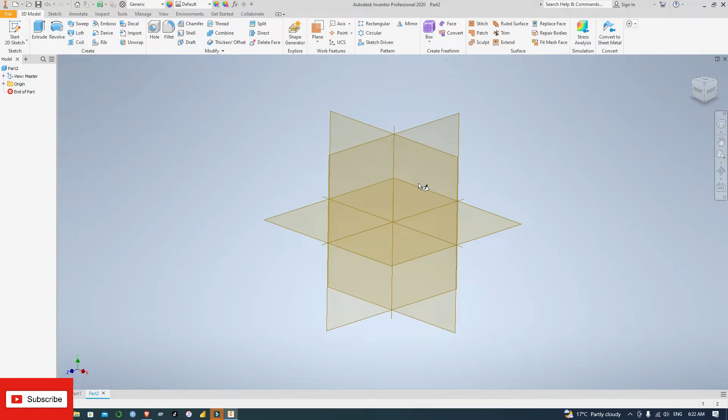Hi, let us sketch simple parts today. When you're doing your sketches, remember that speed is key. You may be given a task and the person wants quick delivery, so always know the easiest methods possible to conduct a task, and assess the easiest approach for you to make the drawing.

We are going to start with drawing the center lines, then offset to the right and to the left, then make the fillets. I'll begin with a center line, and move to the right by 125.3.

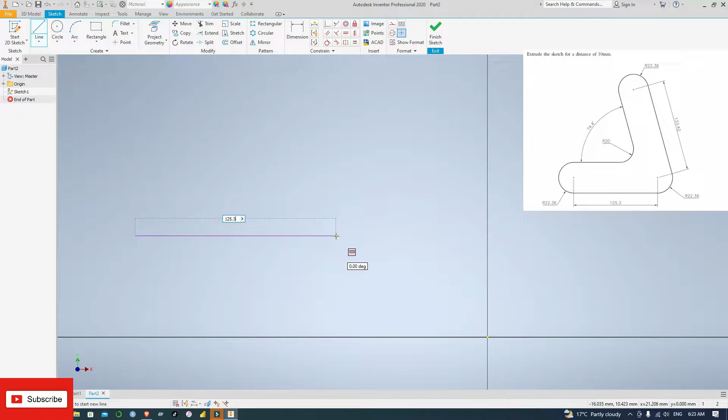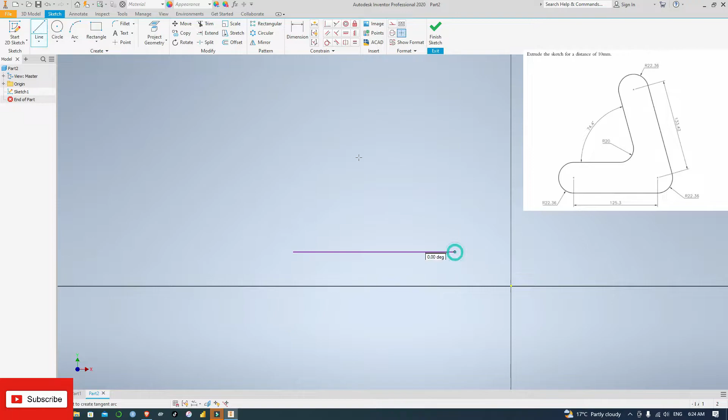Let's move it to this other quadrant. Let me delete the dimension. Then another line from this point going to this other side with a dimension of 133.42. Let me delete this for now, and the angle between these two lines is 74.4 degrees. Enter and click escape.

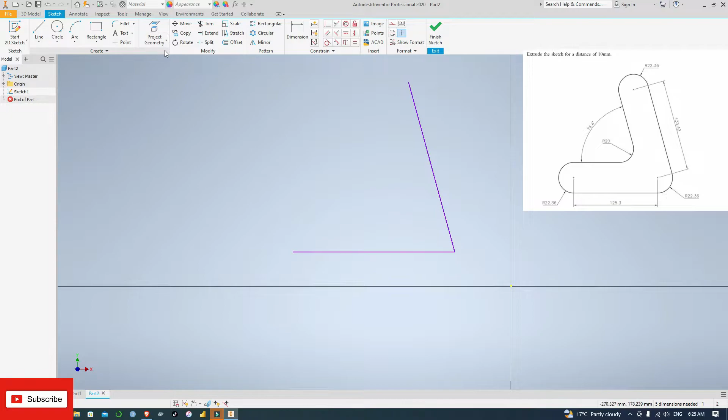I'll delete this dimension, then offset to the right by a radius of 22.36, offset 22.36, offset to the left by 22.36.

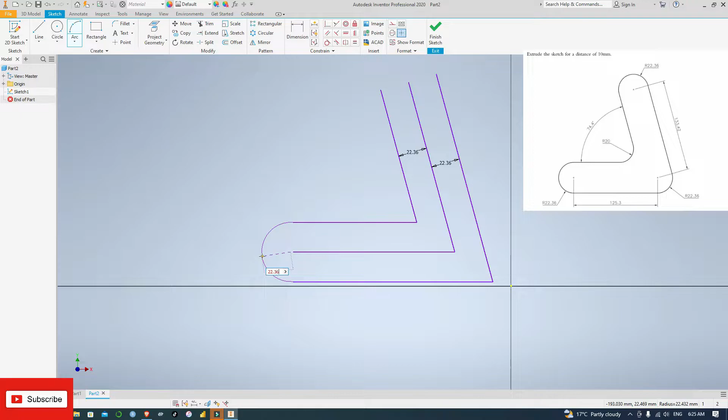Then create an arc, a 3-point arc, by 22.36. Then create another arc, by 22.36.

Next is to fillet. The fillet radius, I'll use 20. Escape, delete this. Then again fillet this point with a fillet radius of 22.36. Click escape so that I can fillet 22.36.

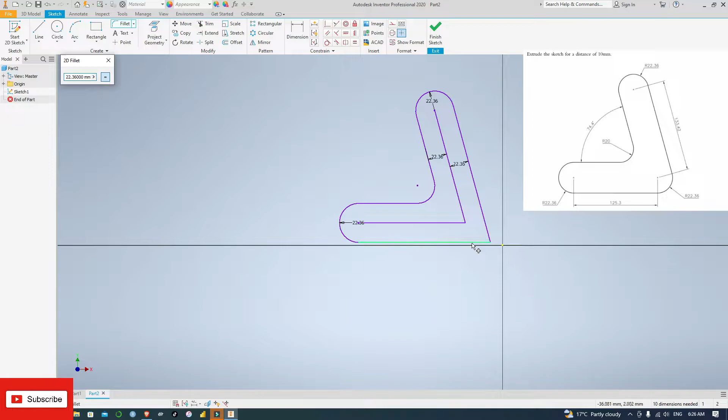Delete the center lines. Delete this so that you can create the right dimensioning.

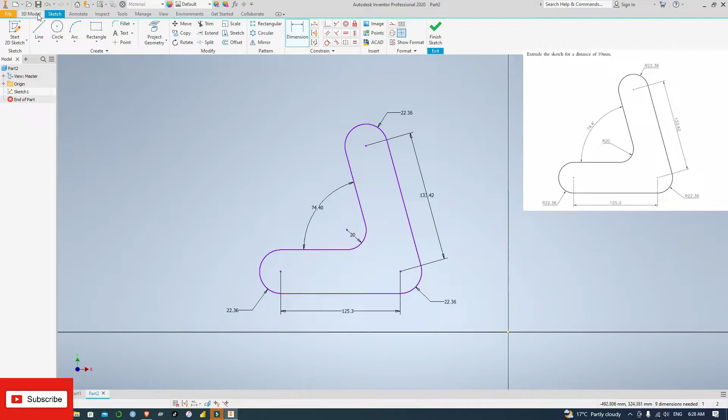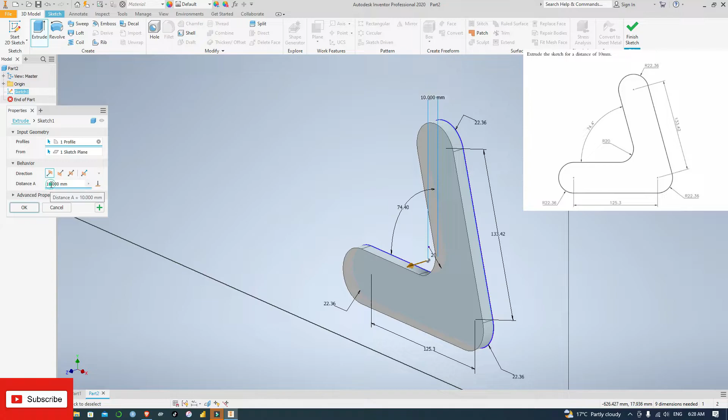One of the instructions is to extrude this by 10 millimeters. So I'll extrude this by 10 millimeters. I'll come to the 3D model, extrude. Let me move this first to this. Yeah, extrude by 10 millimeters. That is okay, then I'll click OK.

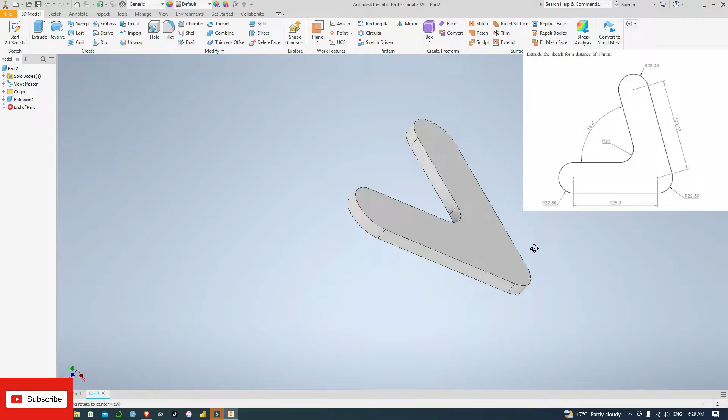So this is how it looks like. I press Shift so that I can check it from all angles. Hold Shift and scroll, and hold the Shift and scroll button so that you can move it and check it through any angle that you wish. Okay, there you have it.

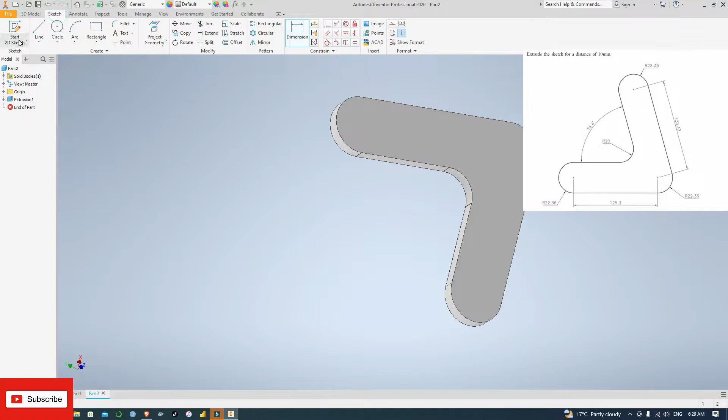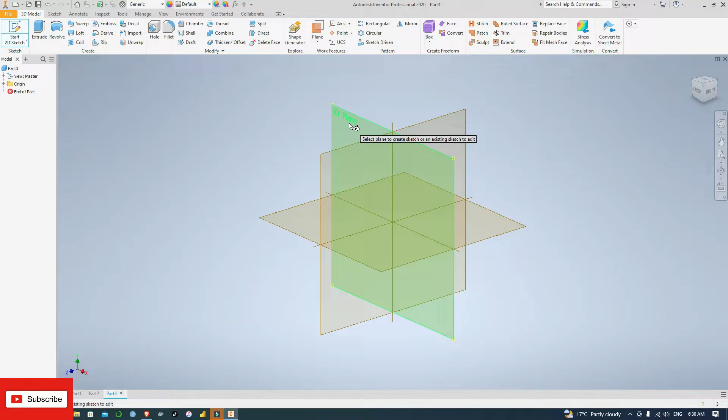Next, you go to the next sketch. Start a 2D sketch. New part, create. After creating, you start a 2D sketch, choose the front plane. Yes, let's move to the next diagram.

In this diagram, when you assess it, we're going to mirror. So I'm going to start from the midpoint, 40 to the left, to the right, 60 upwards. Then I'm going to offset these and take 160 upwards, then move, and then draw a point from here to here. Then I'm going to offset this by 20, then move this by 130 downwards, then I'll mirror it, then use this arc and create this arc, then complete the diagram. So let me begin.

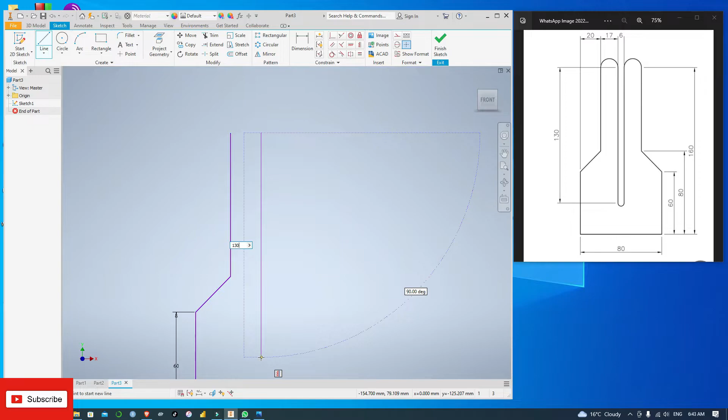Then I'll draw a line from here, goes down by 130, at an angle of 130. An angle of 90 degrees. Then I'll make sure that between here and here the distance is 20.

No, the distance is 17. Then I'll remove the dimensions, then draw a 3-point arc between here and here. Let me draw a 3-point arc. The radius will be 8.5.

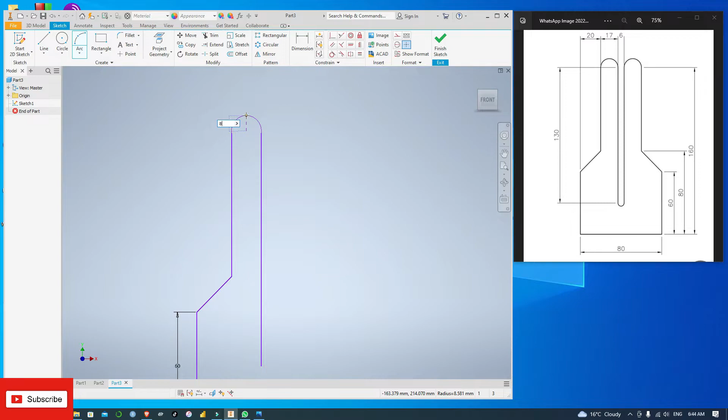So right, we've completed the first.

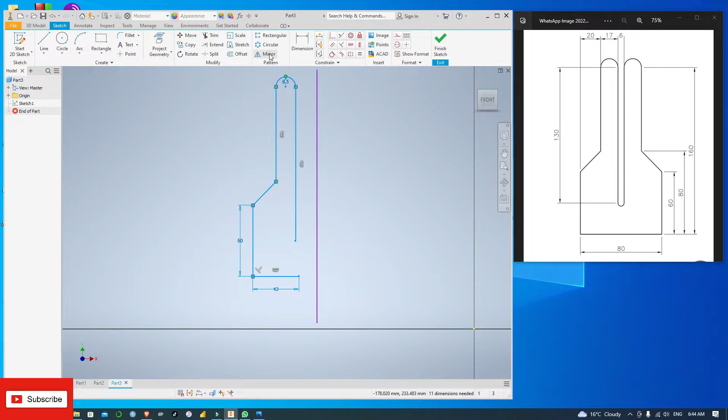So I'll draw this and use the mirroring function. This is the mirror line. Then I'll mirror this. Highlight, mirror. I've selected the mirror. Let me select the mirror line and click apply. Okay, let me remove the mirror line.

Then the distance between these and this is 6. Then I'll draw a 3-point arc between these and this. The radius will be 3.

Let's try to make this coincident. Then delete this such that you start dimensioning the figure.

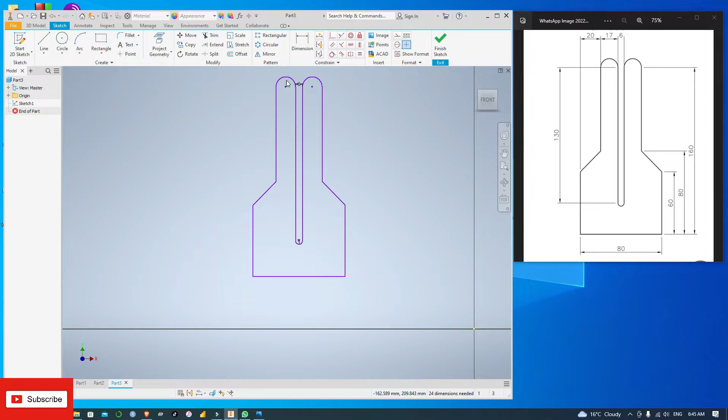And all the dimensions have to be similar to this other side. So let's move this. Let me remove this and move this down. Remove this.

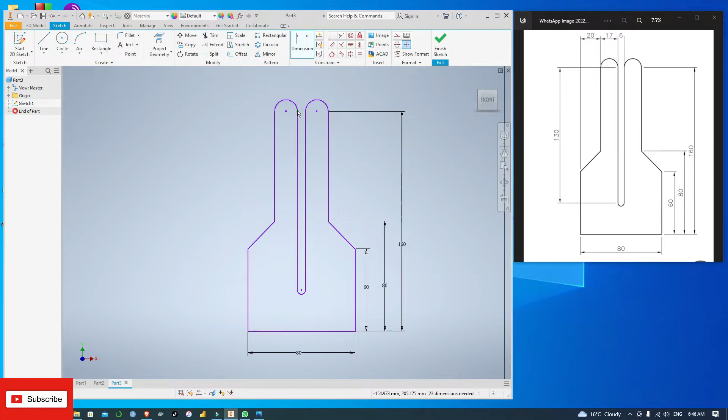So the dimension from here to here is 80. Then from here to here, the dimension is 60. Then from this point to this point, the dimension is 80. Then from this point to this point, the dimension is 160. Then from this point to this point, the dimension is 130.

Click OK. Then from this point to this point, the dimension is 20. From this point to this point, the dimension is 17. Then from this point to this point, the dimension is 6. So we've completed the diagram, and that's it.

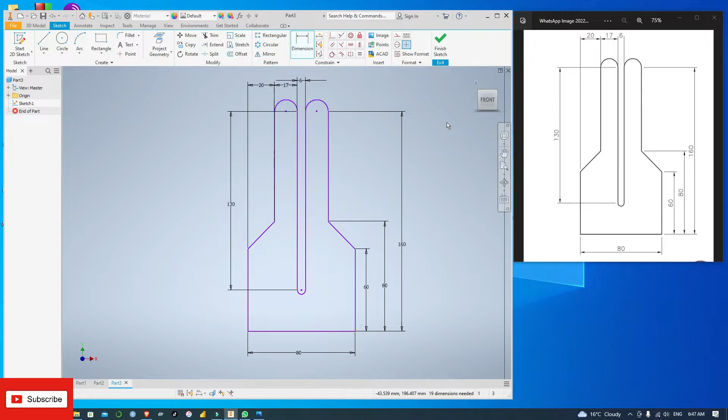Hello and welcome. Let us look at the next simple but complicated design. Let's give it a try.

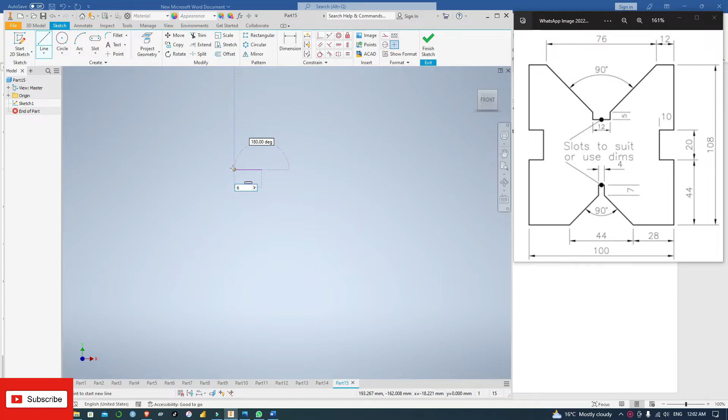From the midpoint to the right, let's use 6. Going upward, let's go 5. Then from one edge to this point, let's select 12. Then from this point to this point, let's select 38. Let's put it here. This has to be 38.

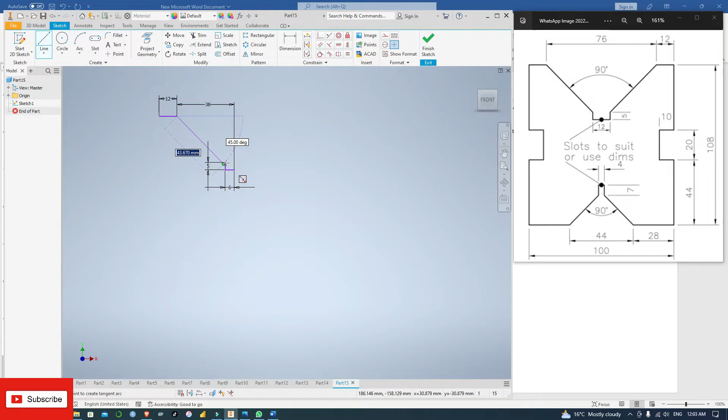Enter. Then let's use this line from here to here, and this angle between this line and this line has to be 45.

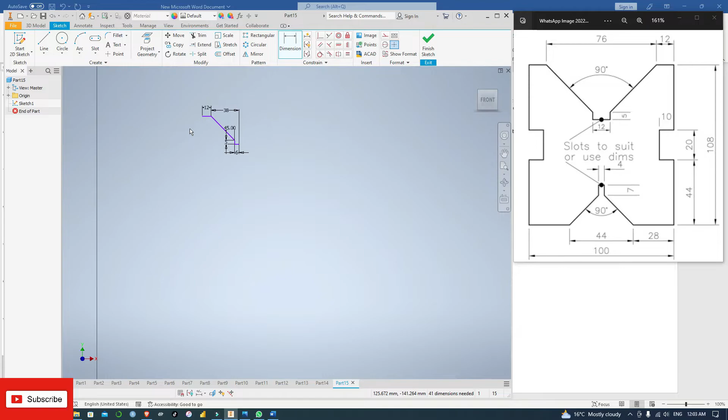Okay, you're good. Let's move to the next drawing from this section, bottom to the bottom section, moving to the right, moving until this point. And let's draw the sketch.

From this point to here, from here to here is 44, meaning the whole of it is 108, so from this point to this point is 44, meaning this one is 20. So I'm going to move down by 44, then I'll move to the right by 10.

Then I'll move down by 20. Then I'll move to the left by 10. Then I'll move downward by 44. Then I'll move to the right by 28.

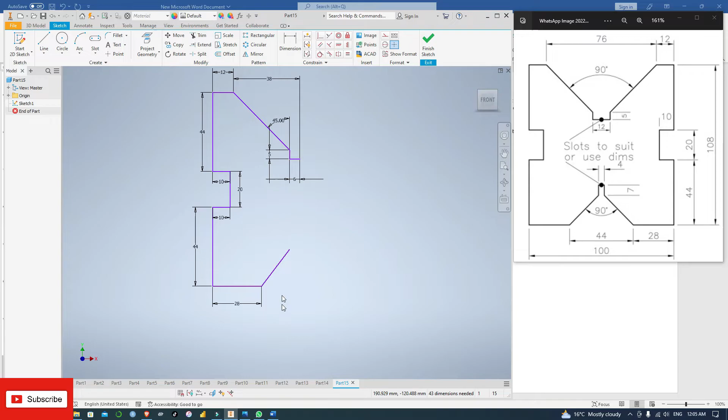Then I have to create an imaginary point. Let's say this point, and try to create an angle of 45 between this line and this line. So let me dimension. This has to be 45.

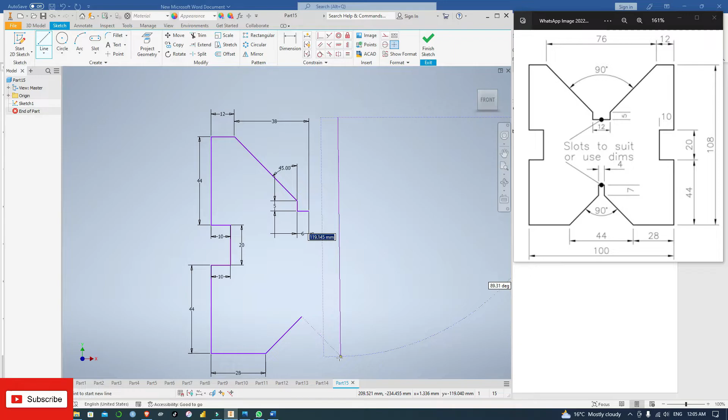Okay, so let me delete the dimension, and let me try to mirror this so that I can get an almost accurate figure, or an accurate figure. Okay, then I'll mirror this figure. Mirror, select the mirror line. This is the mirror line. Click apply.

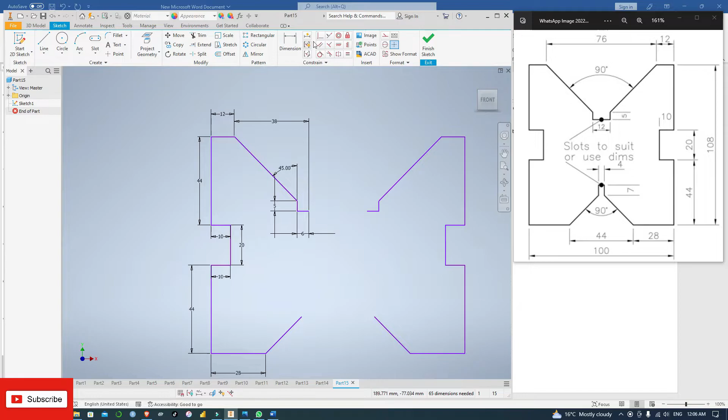Okay, so what I'll do is delete. This is done. I'll delete this line and try to make this point and this point coincident. So I'll come and select this and this have to be coincident, and oh, what happened?

Let's try to edit this. This one has to remain horizontal. This one has to remain horizontal. This one has to remain horizontal. This one has to remain horizontal. While this one has to remain vertical. This one has to remain vertical. This one has to remain vertical. And cancel. Okay.

Okay. Then what I'll do is make sure that this dimension is 12. This one has to be 12. And this one has to be, yeah, this one remains 28, okay. This one 10. This is 10. Just to confirm, this is 20, okay. Then this angle and this angle have to be 90.

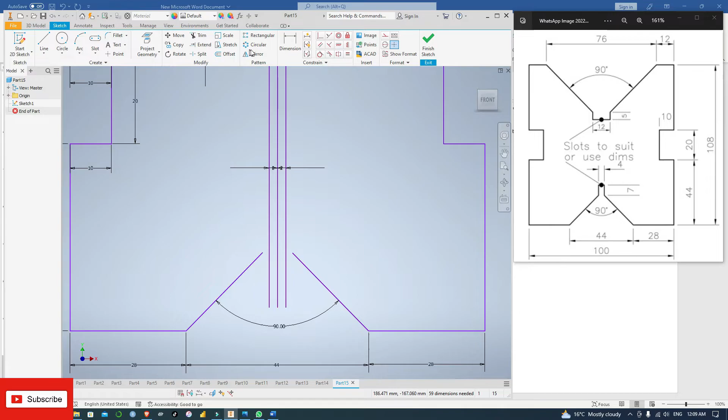Okay, let me offset this to the right by 2, to the left by 2. And make these no, wait, let me extend this. Extend this line and extend this line. Extending the line, I'll trim off this and trim off this.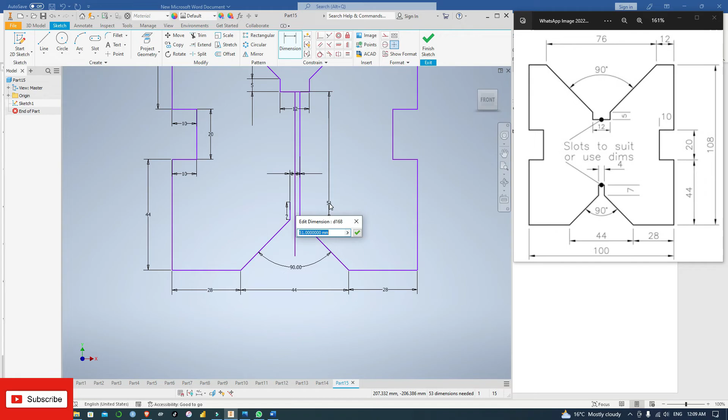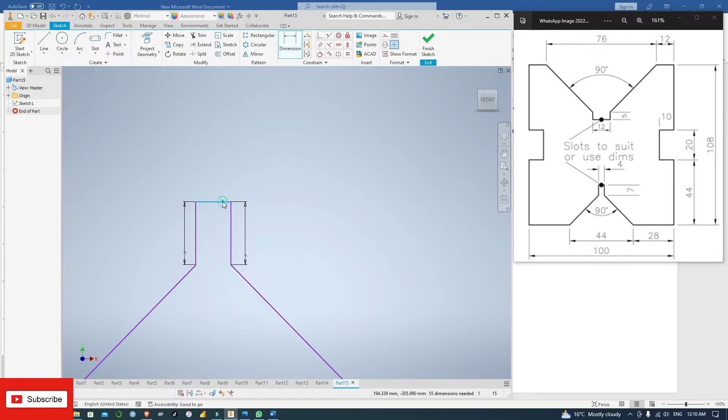After that, I'll make this line have a dimension of 7, and make this line also have a dimension of 7. Then I'll delete this middle line and connect these 2 points from this point to this point and dimension it such that it will be 4. Okay, we are through.

So let me delete these dimensions so that I can dimension it exactly the way that it is in the figure. I can delete these. This remains. All of this deleted. This remains. So let me dimension.

What else is remaining? This is remaining. Okay, and we have the figure completed. After this, we can extrude it.

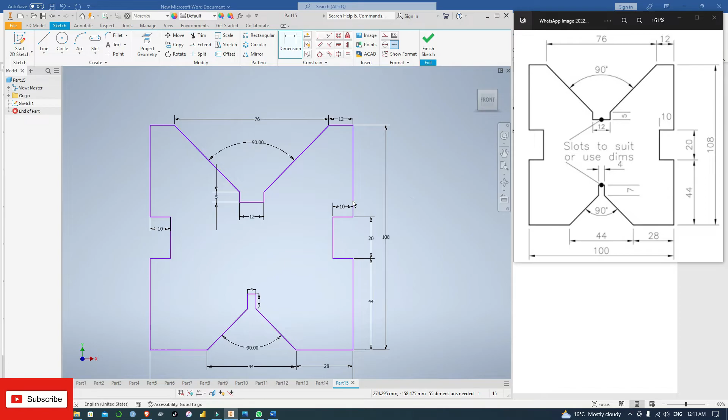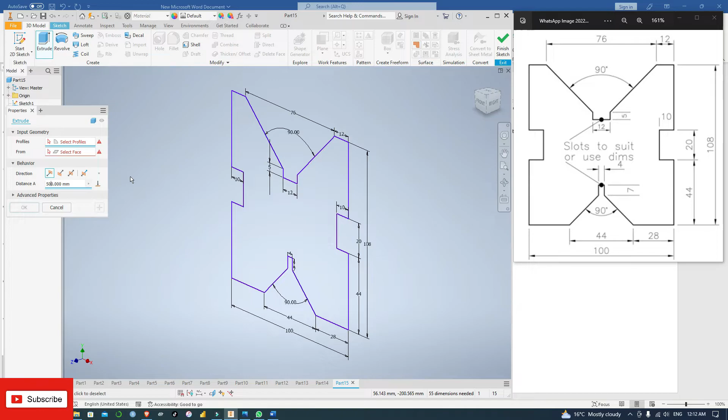Extrude it by let's say 20 or 50. Oh, this is the figure. Okay, this is the extruded figure. Thank you for watching.

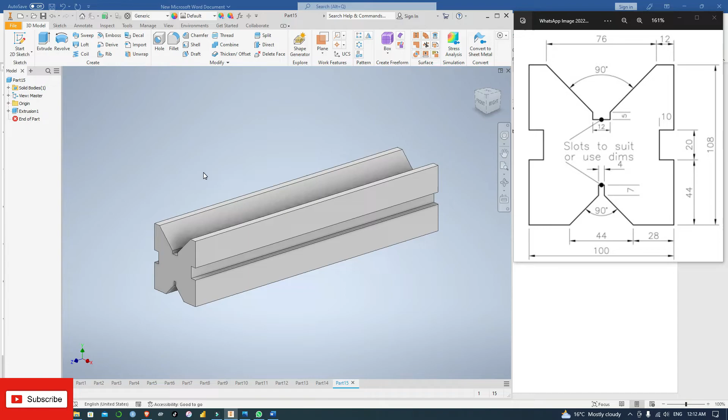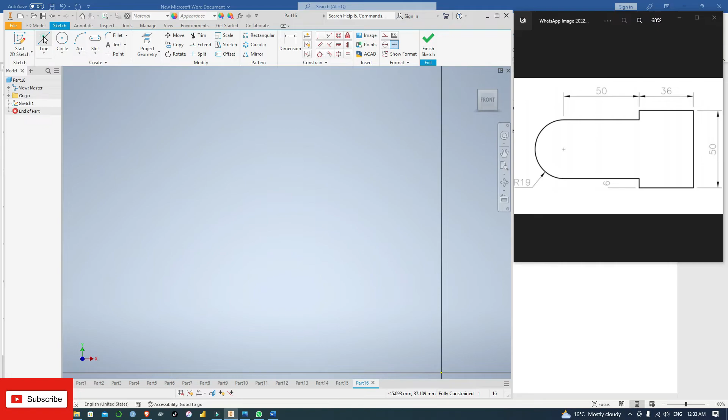I'll start by a line of 50. And move upward by 6. Move to the right by 36. Move downward by 50. Move to the left by 36. Move upward by 6. Move to the left by 50.

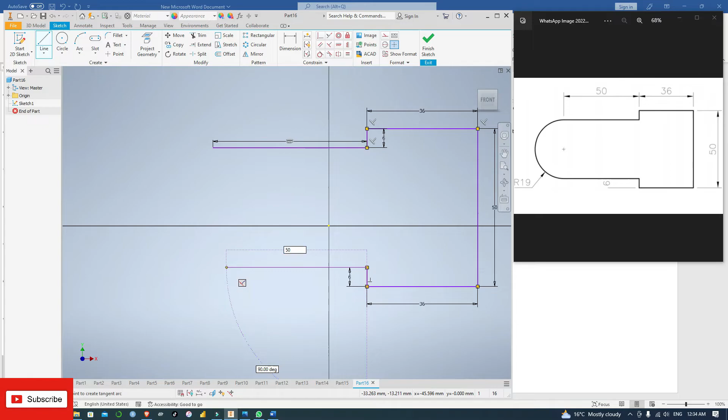At this point, I'll drag to create an arc, then dimension it. This arc is 19. Okay, it is done. Just move this to one quadrant so that it is clearly seen. Yes, this is our figure. Okay.

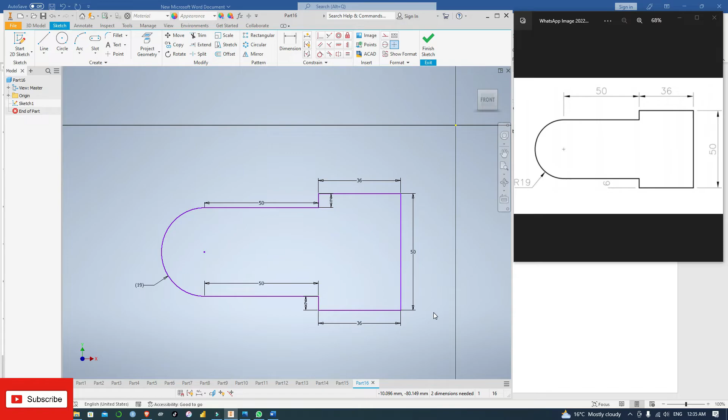Next, we're going to draw these. Let's assume it is an arm that joins the piston to the. Let's say just a piston arm. So I'll draw circles to the top, circles to the bottom, then try to draw some lines.

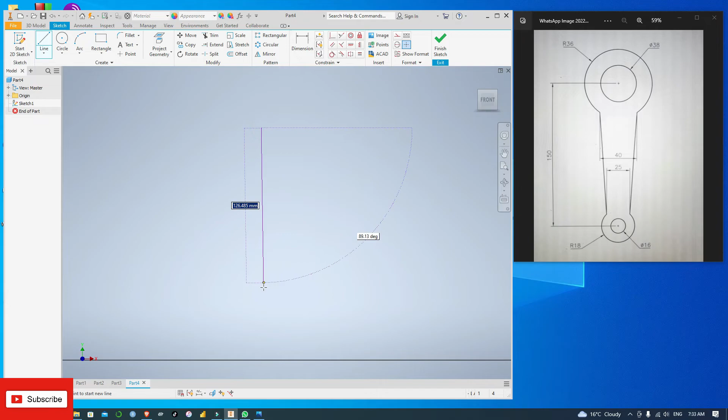Let me begin by drawing lines from this point to this point, and let's dimension this line to be 150. From midpoint to midpoint, 150 millimeters. I'll type in 150 millimeters. 150. Okay.

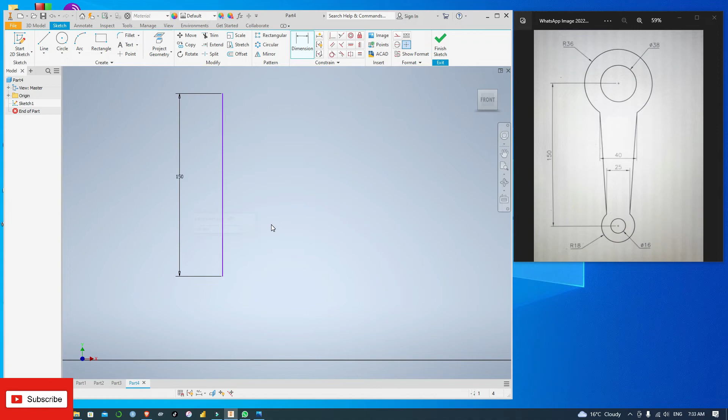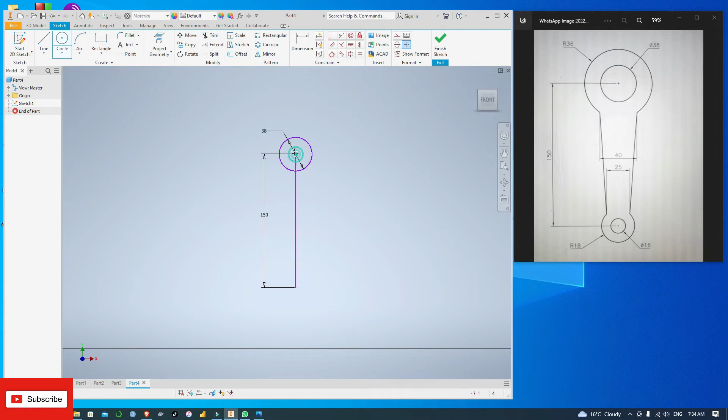Then I'll use this as a center point to draw. The first circle, the diameter is 38. The second circle, the diameter is 72. 72.

And this circle, the diameter is, let me try to offset this first. Offset this by, the first is 12.5. Then try to offset it by 20. Then offset this by 12.5. Then offset this by 20.

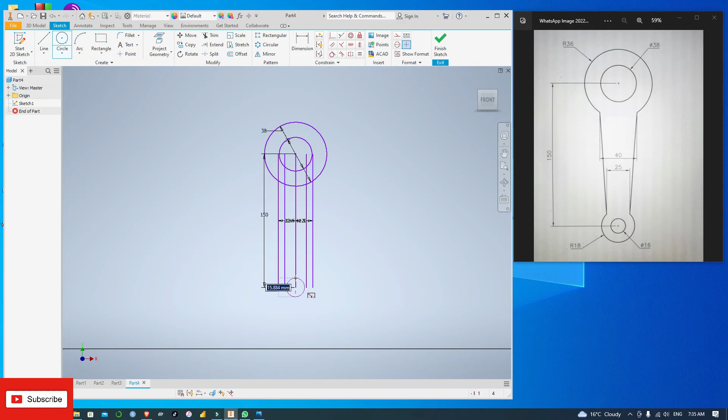Then after that, try to draw a circle whose diameter is 16. From this point, diameter has to be 16. Again, from this point, draw another circle whose diameter is 18, whose diameter is 36.

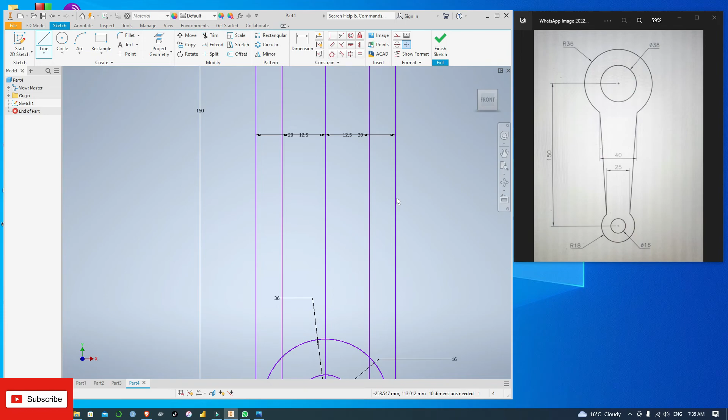Okay. Then trim lines. Instead of trimming lines, let me join this point to this point. Draw a line from let's trim them first. Trim this, trim this, trim this, trim this, and continue trimming the rest.

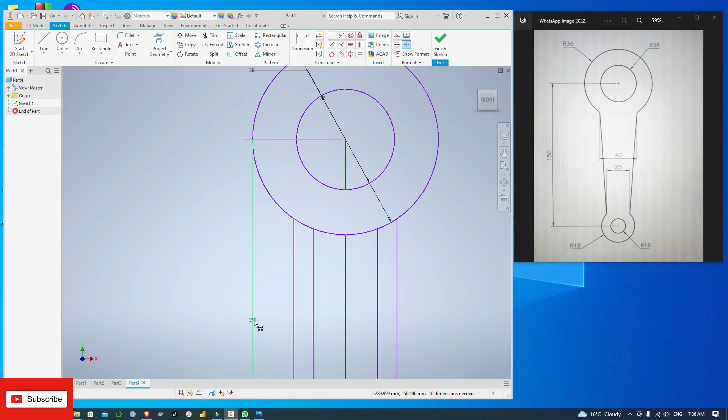Okay, remove the dimension. Then I can trim it. Then connect these points to these points. Then connect these points to these points, and continue with the trim.

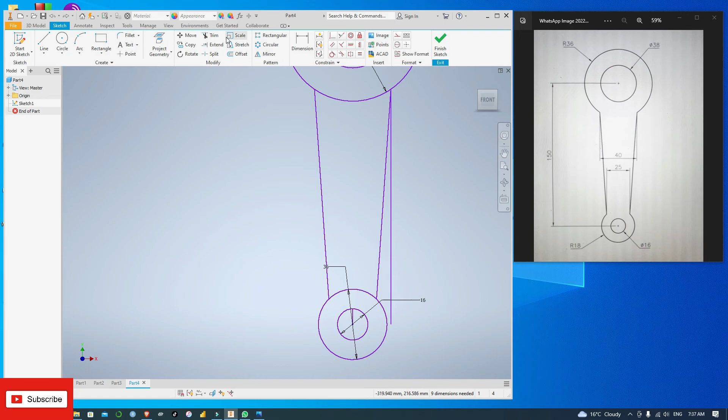Trim these, trim these, trim these, trim these, trim these. Oh, Control Z. Trim these. Yeah, I can trim these two, trim these two. Then I have it. So let me insert the right dimensions. Delete, delete. I forgot to trim these. Delete.

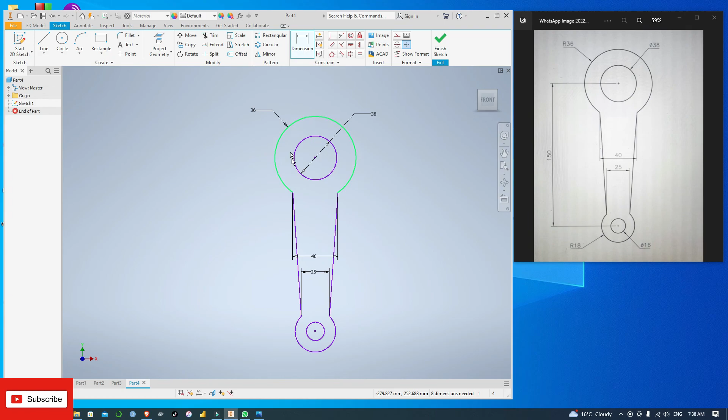So dimension R is 36. Okay. Diameter is 38. Okay. Diameter from here to here is 40. Okay, from this point to this point, dimension is 25. Okay, from this point to this point, the dimension is 150.

Okay, then the radius of this is 18 to the left. Okay, then the diameter is 16 to this point. Okay, we have it.

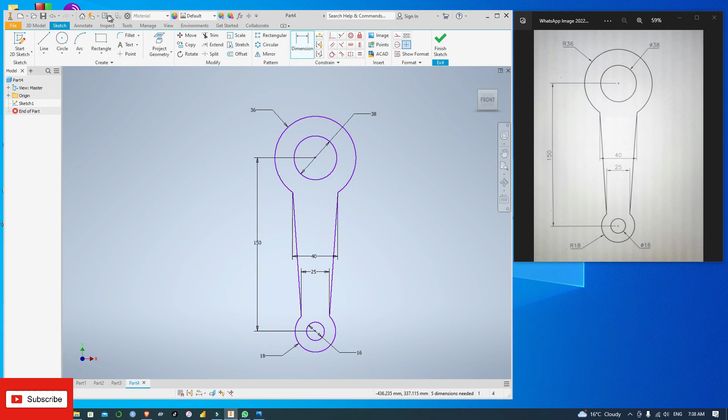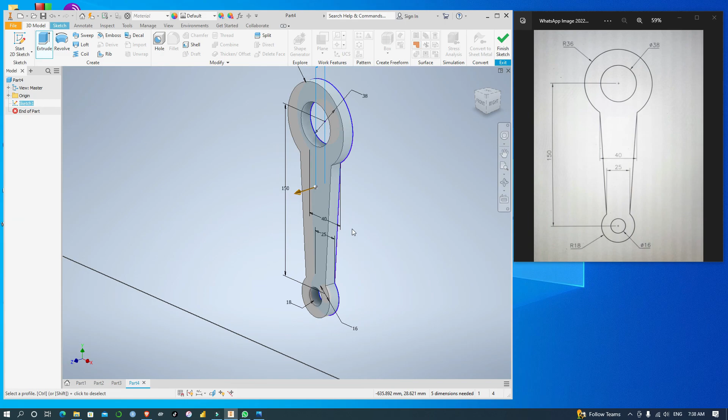Then we can apply extrude 3D model, extrude, and we can extrude this by 10 and click OK. So here we have it.